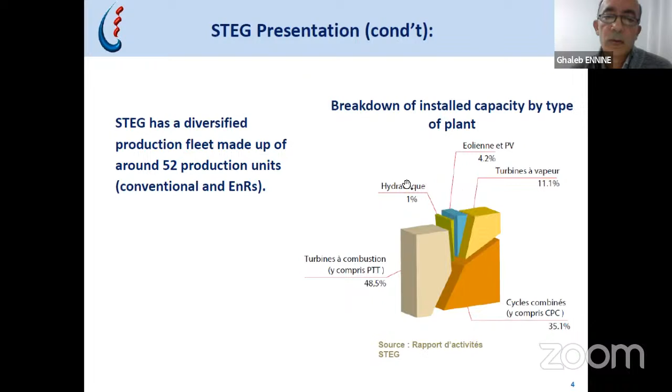STEG has, in fact, a diversified production fleet. We have about 52 production units, especially combined cycle turbine, combustion turbine, and importantly, our renewable energy is very small, about 4% compared to the total power installed in STEG.

This slide shows that our resources in primary energy, here in red, are in continuous decline of about 7% per year from 2010, while demand, here in blue, shows an annual increase of about 1% per year, and we have a deficit of almost 6,000 ktoe.

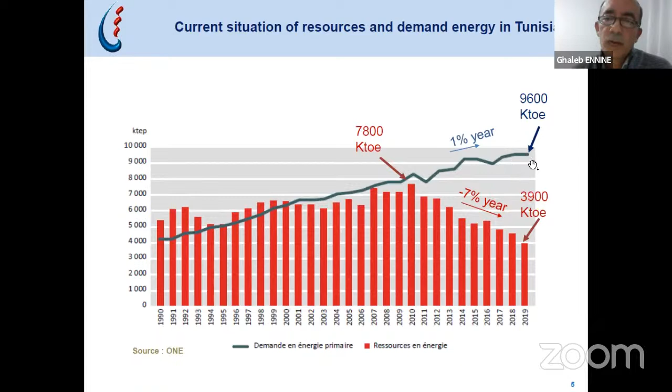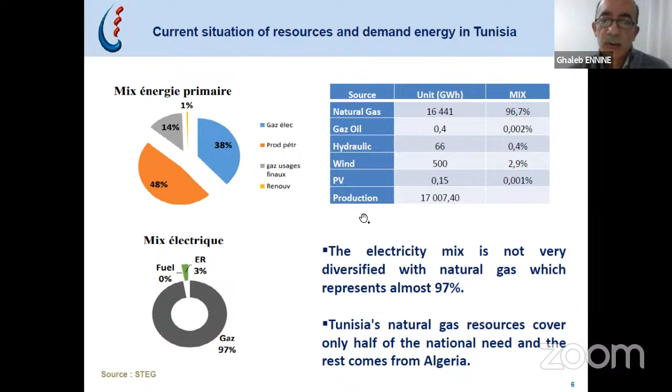As I said, the part of renewable energy is very small, and our energy mix is mainly based on fossil natural gas. Renewable energy is about 3 to 4% compared to the total installed capacity. Also our Tunisian natural gas resources cover only half of our national need, and the rest comes from Algeria. So we don't have energy independence in Tunisia, and that's why we should look to other resources, other green resources, in the future.

This slide shows the workday load curve. Here in green we notice that the maximum peak is in the day, between 10 to 6 p.m., especially in summer. The green curve is in summer, and the other curves are in winter and other seasons. So we have a very important development of summer peak, which could cause significant operating problems and may sometimes lead to load shedding operations in some regions in summer. And we have a fairly low winter load dip, and a very high specific consumption.

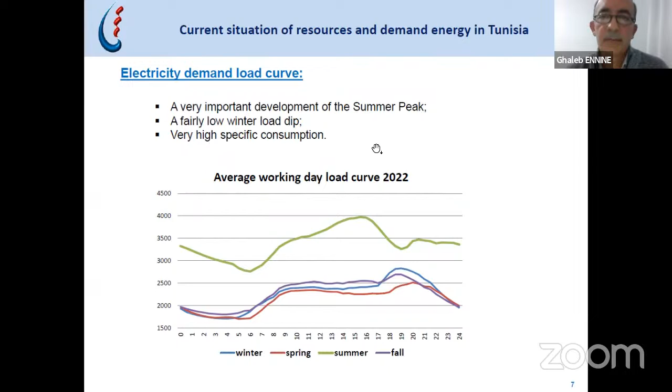Our national energy strategy has 3 targets: energy efficiency, renewable energy integration, and greenhouse reduction.

This has been debated since 2013 and reviewed in 2022. For energy efficiency, we have to accelerate action with the aim of reducing national primary energy consumption by 30% in 2030 compared to 2010.

For renewable energy, we have a challenge to reach the target of 35% in 2030, 50% in 2035, and 80% in 2050.

For greenhouse reduction, following the ratification of the Paris Agreement, Tunisia is committed to reducing CO2 emissions by about 45% reduction in carbon intensity in 2030 compared to 2010.

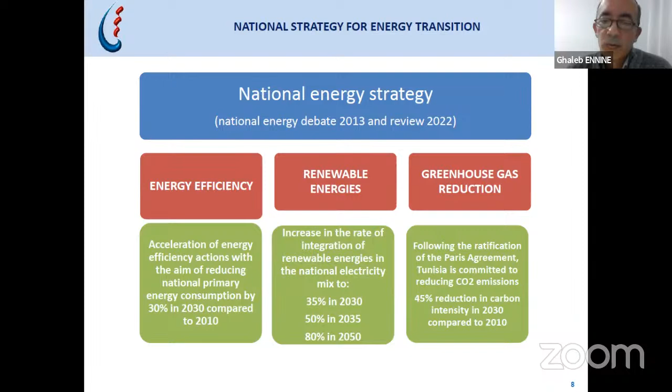This slide summarizes our STEG activities, the main topics we are currently working on. We work on renewable energy integration, demand management, storage and flexibility, green hydrogen, and electric mobility. All these topics are governed and linked by a smart grid.

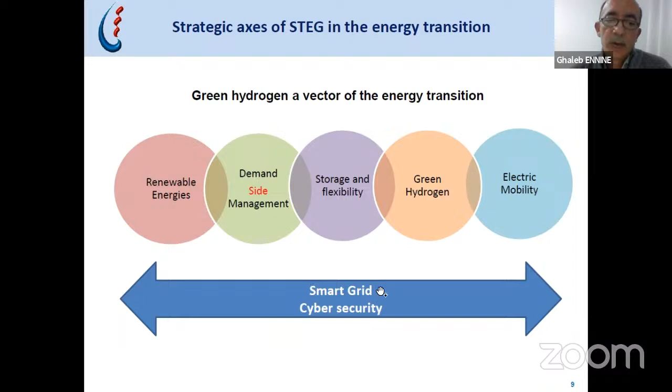We now have a grid project in STEG in order to introduce the smart grid in our electric park. This slide shows the complexity and interaction of the main topics we have in STEG.

Reinforcement of energy efficiency action, development of renewable energy, development of cross-border electrical interconnection, energy efficient technologies, contribution to the Tunisian solar plan, migration to a smart grid, deployment of energy storage solutions, development of electricity exchanges with neighbor countries like Algeria, Libya and Italy, and development of electrical connection projects.

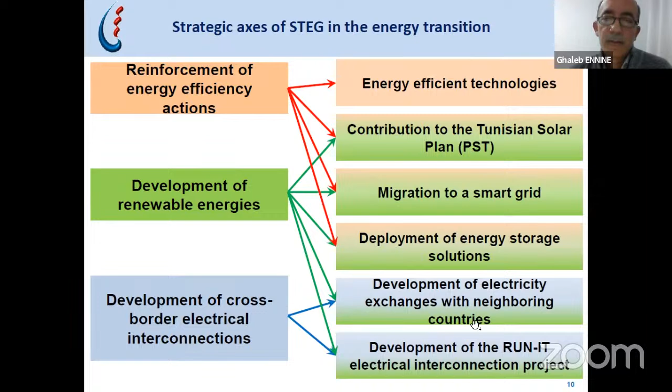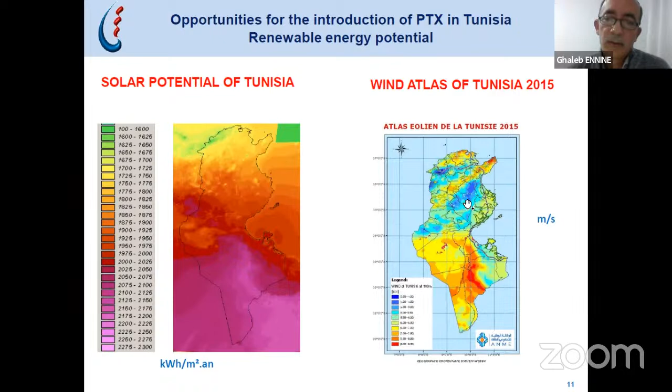And also for wind, we have good values in the north and in the center, marked here in blue color.

As I said, our renewable energy share is very small. The current situation is very little, about 250 megawatts in renewable energy.

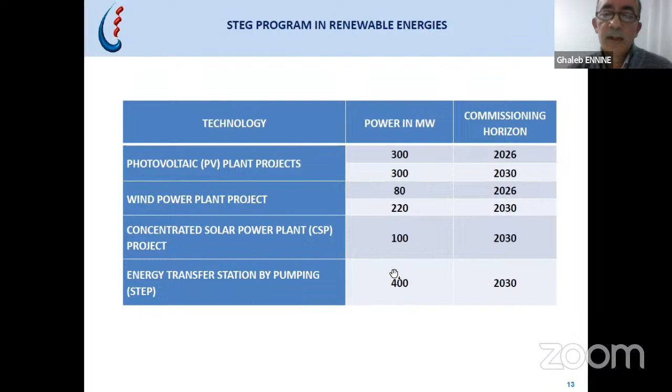This table summarizes the future projects to be achieved in Tunisia: photovoltaic, wind, and also concentrated solar power plants, CSP. The big project is the energy transfer station by pumping, which we call STEP - stations de pompage et turbinage. This is planned for STEG by around 2028 to 2030.

This slide shows that in Tunisia we have a significant potential for hydrogen. It is estimated at 25 million tons per year.

This potential largely satisfies local needs and export to European countries. Here it is the European country demand in 2030, and here our potential - we have a very big potential in Tunisia, both for local use and for export of green hydrogen.

And here we have two scenarios: the ALT, which is the moderate scenario, and the ADV, the advanced optimistic scenario.

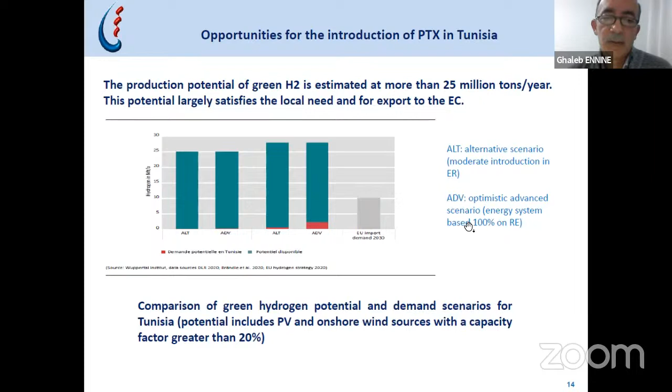This chart explains the evolution of the production and consumption of green hydrogen in different sectors: transport, the electricity sector, and other sectors.

We notice that starting here in dark blue is the transport sector, which will begin in 2030 and 2035. The electricity sector, in light blue, will begin in 2040, with some industrial use in the industrial sector and the electrical sector.

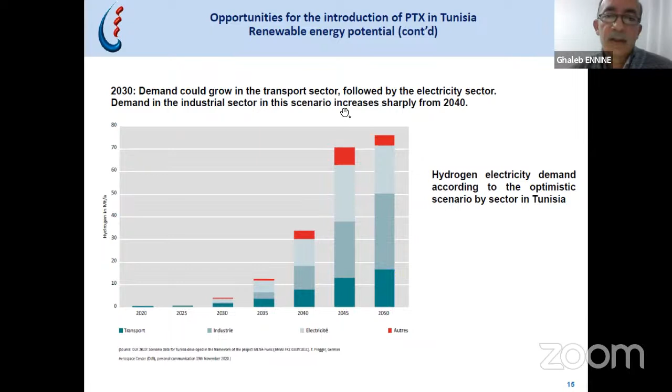So here in Tunisia we have some opportunities to ensure better stability of our electrical network by smoothing the consumption peak, especially in summer, through the use of gas to power storage fuel cells.

This chart summarizes that we could find solutions especially for isolated sites, because we have some isolated sites in Tunisia, some islands like Kerkena Island, and the extreme south like Tataouine, Tozeur, etc. Bringing electricity there is very costly, so why not use fuel cells combined and coupled with batteries, lithium batteries - this solution could provide more than 7,000 hours of continuous operation.

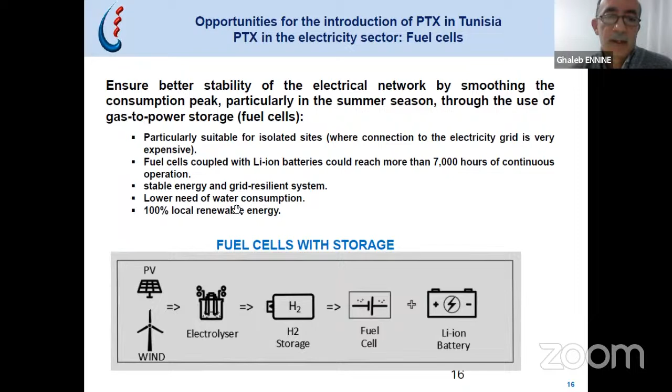The second opportunity deals with power to gas. In this solution, the produced hydrogen could be injected directly into the gas pipeline. It could be blended with natural gas or used as 100% hydrogen.

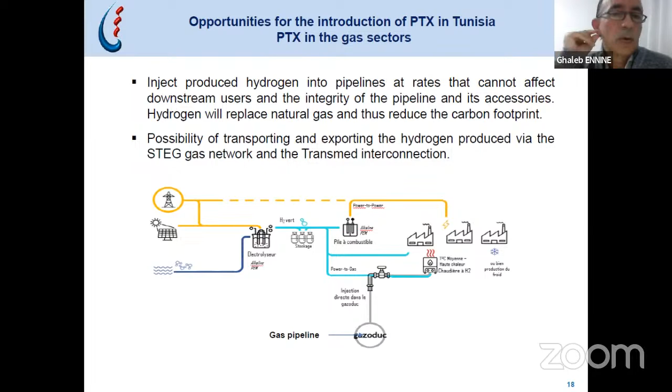In Tunisia we have a good gas network. Here it shows our gas network, the Tunisian gas network, and here is the Transmed gas network that comes from Algeria across Tunisia, and then crosses the Mediterranean Sea to Italy. So we have the opportunity to transport hydrogen from the south and central regions to the north for export. It could be consumed locally, but we also have the opportunity to export it to Italy.

However, I think that the economic viability of injecting green hydrogen nowadays in the short term is not justified, because I think it is better to develop its derivatives, like ammonia, given the very significant local needs, in particular for the phosphate industry.

As a number, our phosphate company, the Groupe Chimique, has an ammonia consumption of about 450,000 tons per year. So a very big quantity that would be produced locally from green hydrogen.

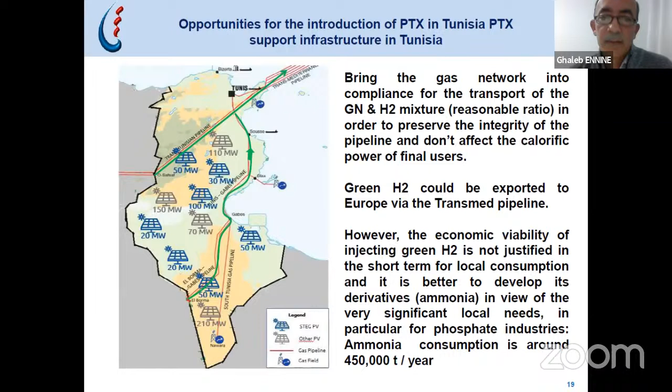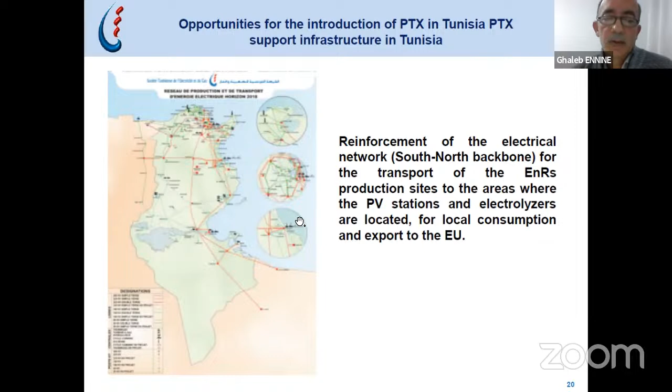Another opportunity is the hydrogen turbine. Hydrogen turbine for STEG is a very, very important topic. Unfortunately, nowadays I think it is in the experimental stage, but as an opportunity for us, we will substitute fossil natural gas with green hydrogen, and we will have better energy independence in our energy mix. I think that in the future it is a very promising technology that will make significant progress in the medium and long terms.

We see that Siemens and Mitsubishi have already produced some prototypes of these turbines, and they are very promising for the future. But in the short term we have the challenge that they are large consumers of green hydrogen. This requires vast land to be secured for renewable energy plants, water consumption - because we have hydric stress in Tunisia, so we have the problem of water consumption - and storage facilities, transport, etc. This is the challenge, but we are confident that in the middle and long term, the hydrogen turbine will play a very, very big role in our energy mix.

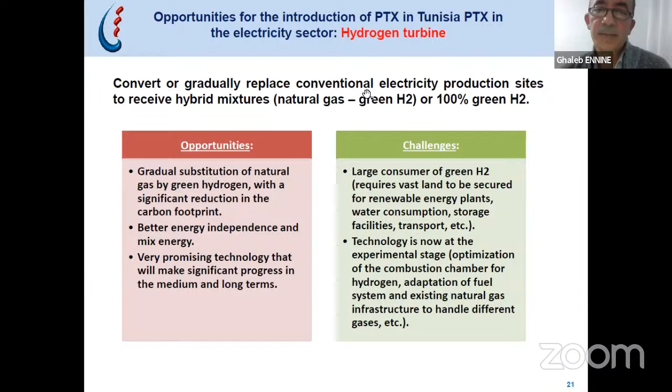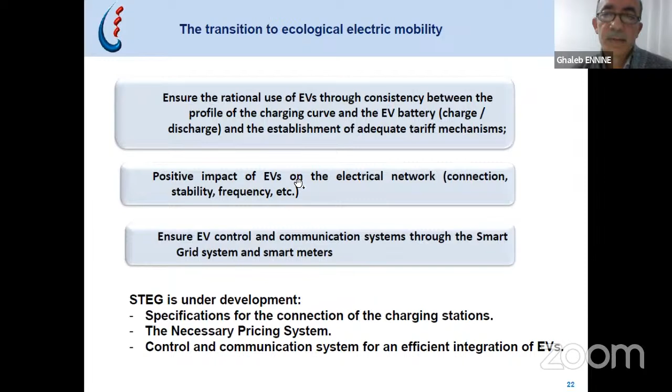As I said, we have many challenges in Tunisia, which I will summarize here: the share of renewable energy currently represents only 3% of the Tunisian energy mix. Hydrogen only becomes relevant as a storage medium when the share of renewable energy is above 70% in the electricity mix. So right now we cannot speak about the derivatives of hydrogen or other technologies - we have to reach 70% in order to begin the green hydrogen industry.

Green hydrogen production sites are currently limited to coastal sites for seawater supply purposes, and unfortunately for inland sites they have difficulty with this technology, so we will think about solutions for inland regions. Why not introduce some hydrogen activities with the purpose of recycling water, like with fuel cells that could recycle water and reduce water demand.

Also, we have the contractual scheme, which could be public-private partnership, or 100 private or 100 public, and we don't know. We don't have a very clear idea about the contractual scheme for the future project, and also there's an absence of a framework governing the marketing of green hydrogen in the local market and/or abroad.

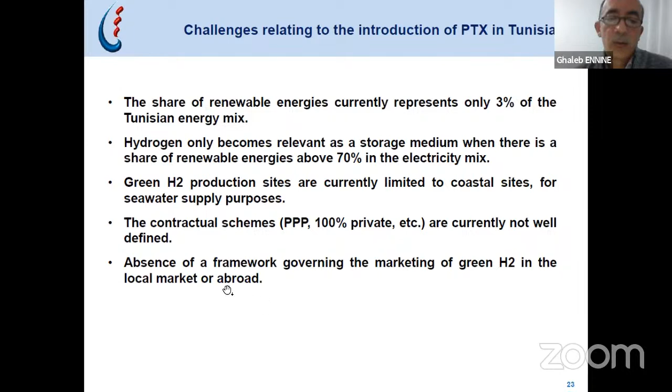So I thank our Ministry of Industry for creating a steering committee that involves the main stakeholders, with the task to develop the national strategy of green hydrogen, support the creation of a green hydrogen economy, strengthen research, training and innovation, and set up a pilot hydrogen production project in collaboration with international institutions. This committee will be assisted by local and foreign experts during the development of a strategic plan, scheduled for the end of 2024.

So I come to the end of my presentation. Our target is to develop our strategic plan before the end of 2024. We have to analyze the potential of existing infrastructure and the need for additional infrastructure for the development of our Power-to-X.

We need to participate in the development of an appropriate regulatory framework governing Power-to-X in Tunisia - I mean the contractual scheme - and participate in the establishment of regulation relating to the marketing of green hydrogen and derivatives in the local markets, or if they are intended for export.

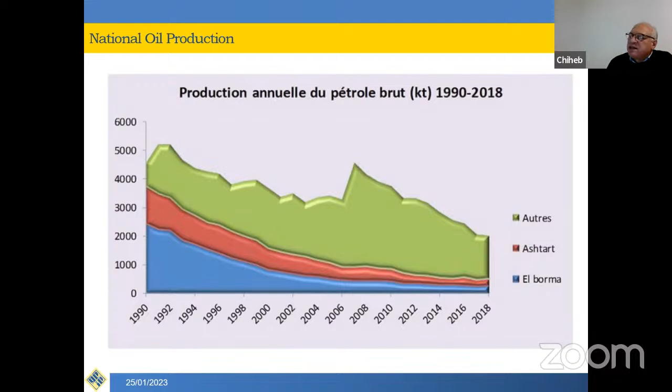As you know, Tunisia produces some oil and some gas, but this production is in recession for both oil and gas. And of course, now we do not have self-sufficiency, mainly in gas and in oil, both. And so we are importing gas from Algeria, and as you see, the amount of imported gas becomes much higher than the amount of gas which is locally produced, which is now a serious matter of energy independence.

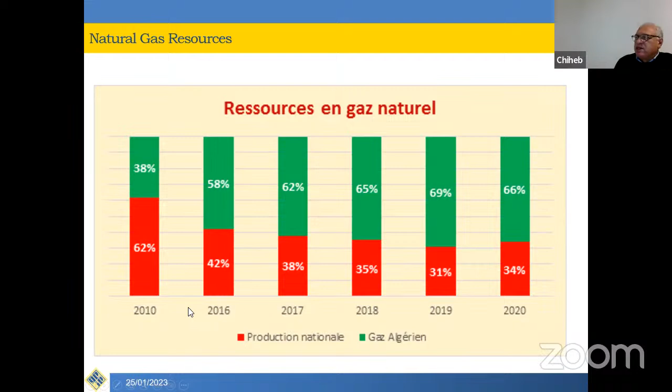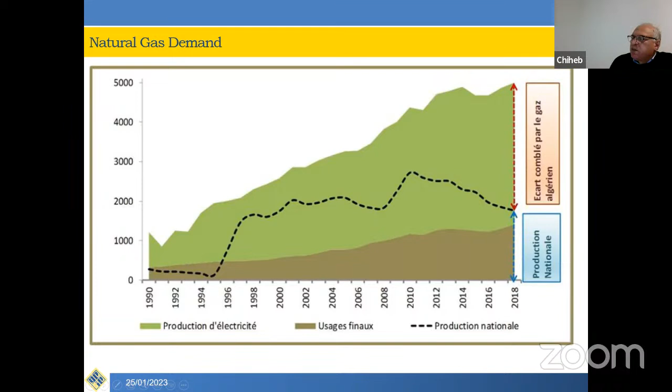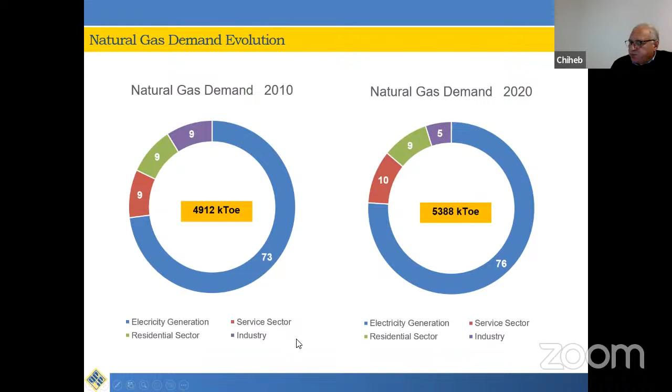And so the global resources from primary energy resources, from fossil ones, are in recession, and this is not a good sign. Now, the demand is increasing every year, and this demand is shared between electricity generation, which takes most of the imported gas, and then, of course, the rest of the sectors, meaning industrial, residential, and so on.

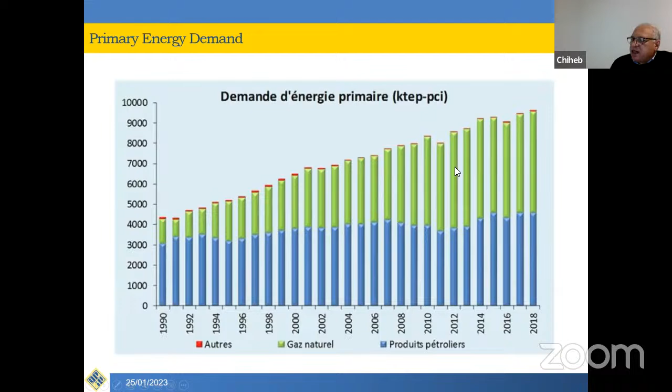This is the demand in terms of oil products and gas. And then the balance, as shown by Ghaleb Enin a few minutes ago, shows that we now have a deficit.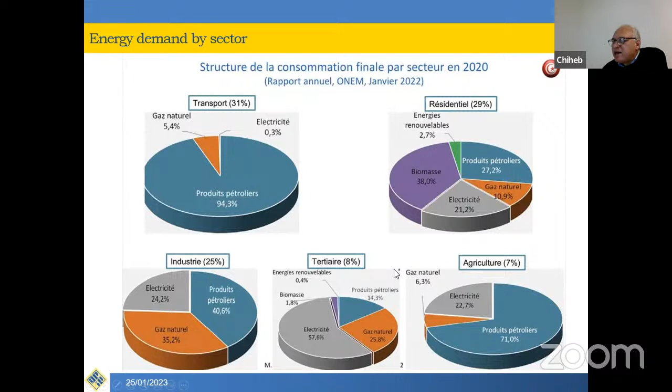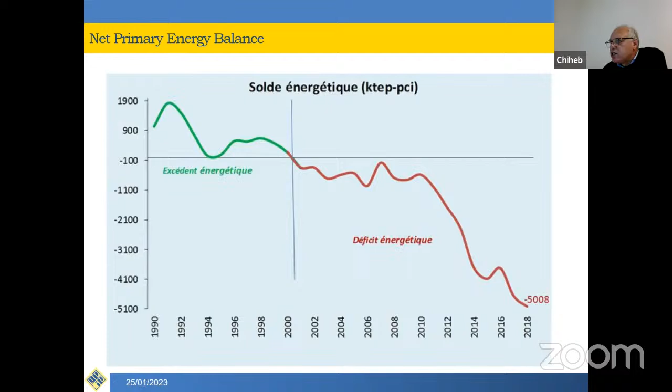This is nearly the same. So this is the net deficit now, that Tunisia has a deficit on energy, and so we need to import and to find alternative resources.

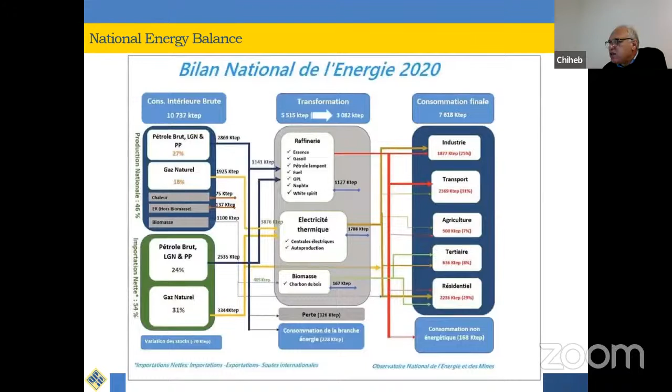This shows the balance between the different sectors, and I think we have seen it on the graph.

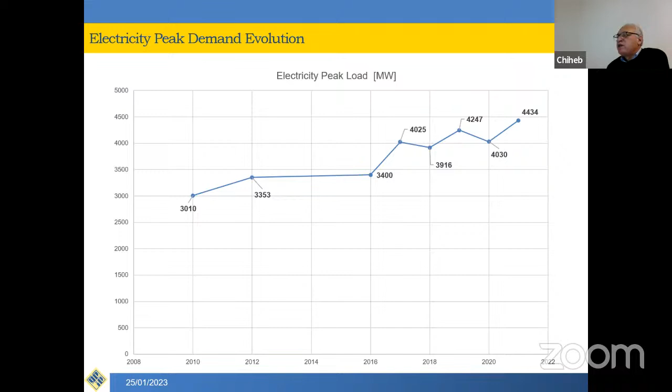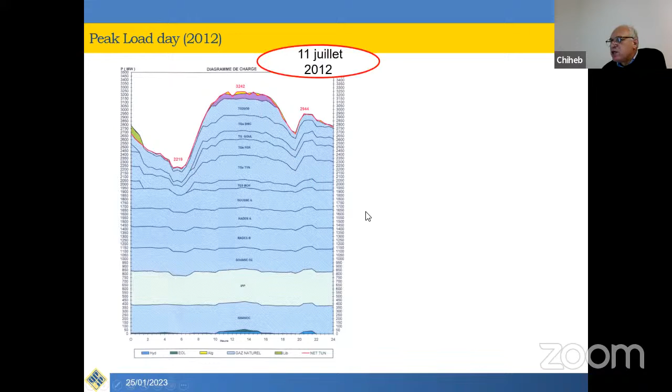Then for the electricity sector, we can see that the electricity peak demand is increasing from one year to the next. This peak demand has been shown by Mr. Ghali Benin, and we see that there is a difference between summer and winter, and also a large difference between the trough and the peak, mainly in summer. This is also a new challenge for which Tunisia has to find real solutions.

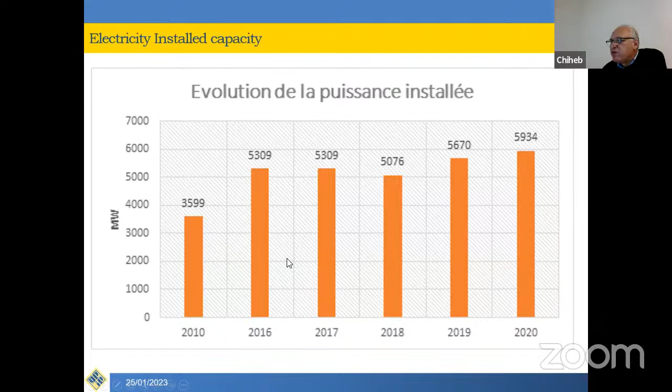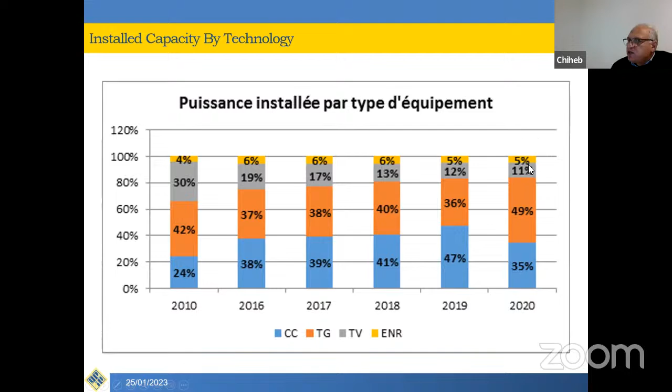Installed capacity, I will go fast because Ghali has shown this. So we have something like 6,000 megawatts of installed capacity, mainly running with gas now. It's shared between combined cycle, gas turbine, steam turbine, and renewables. The share of renewables is only 5% of the installed capacity, and the national production is also in evolution.

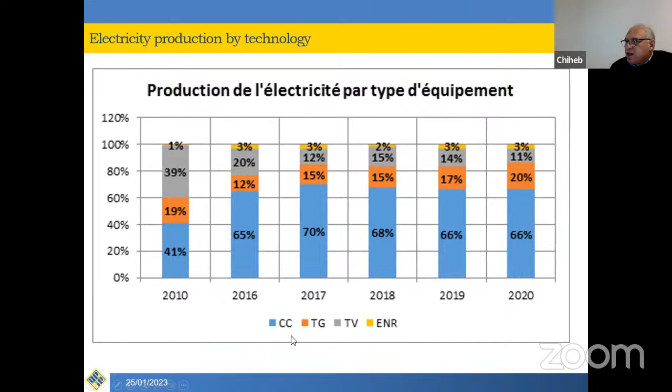Now we can see that the share of renewables is only 3%, and mainly the combined cycles are offering the major part of the electricity demand. Now here we can see some facts about...

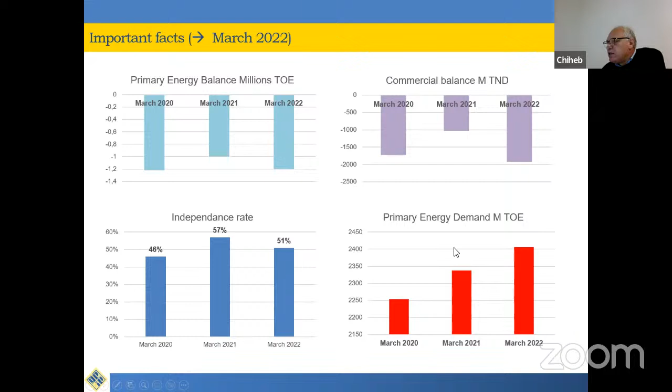This shows the comparison between the month of January until the month of March. For the primary energy balance, we see that the balance is negative, of course, but the trough is going to be deeper every year. The commercial balance is influenced, of course, because of the import and also later on the subsidy. The independence rate is low, so we have only 50%, or less than 50% sometimes, of independence, and the demand is increasing every year.

So then Tunisia has built this Tunisian Solar Plan, which is aiming to produce 30% of its electricity by 2030. This objective has been revised to become 35% by 2030, and it aims also to reduce the CO2 emissions by 30% by 2030, and now this has been also revised to 42% CO2 reduction by 2030.

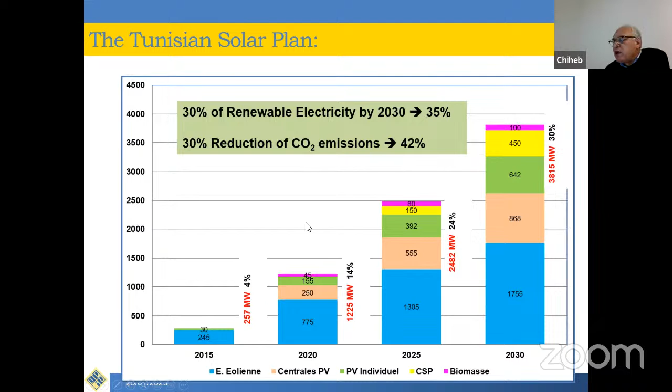So we have two major objectives: the implementation of renewable units for electricity production and the reduction of CO2 emissions, and this can be done only by the implementation of renewables.

This ambitious solar plan aims to build PV and wind plants by STEG, by private sector, meaning auto production in the private sector, as producers and providers for STEG later on, which will be in charge of the distribution.

STEG has its own projects, and some of them have started to produce. Some of them are under construction, and some of them are in the contracts phase, and so it's going on. And of course, these are the planned capacities.

Besides STEG, we have the private sector, which will come through concession and authorization schemes. Concessions mean that they will have the location and the land provided by the government or by the Tunisian authorities, and the authorization scheme means that the producers will provide the land on which they will implement their systems.

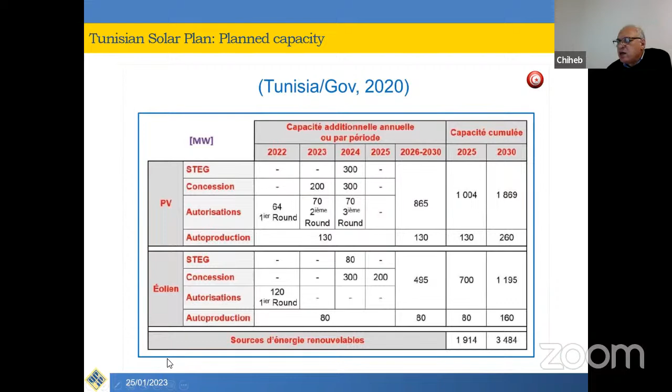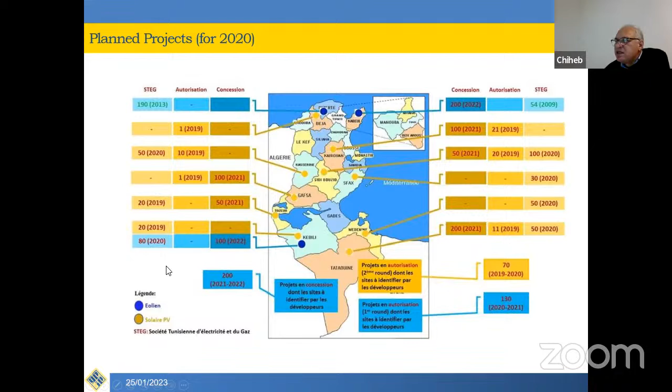We will see that these new renewable plants will cover all the regions of Tunisia. We see the different models and the different locations, and we see that we cover all the land. This is very important because it will contribute to the regional development in Tunisia, because now some regions are missing development because they lack enough electricity for the implementation of production plants.

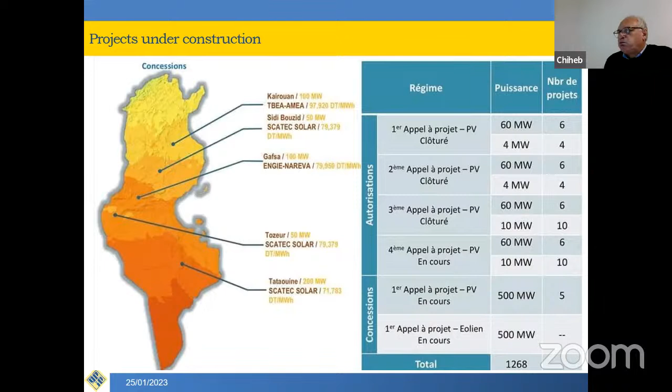These are the projects which are under construction. The contracts have been signed and the projects are being developed. We also have the distributed PV installations, which are part of a national program that was a successful program.

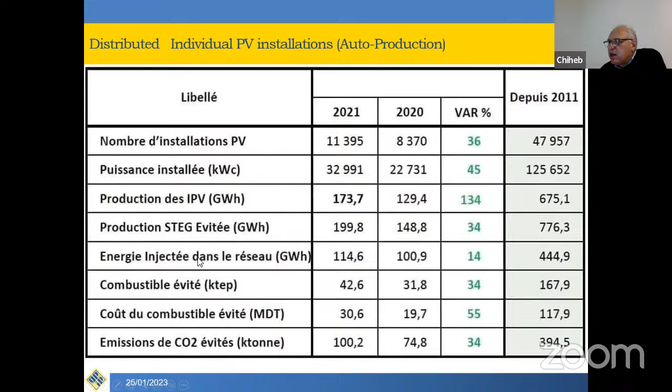It looks as if the internet connection is a little bit broken. Can you hear me? Yeah, yes, we hear you. The connection is interrupted.

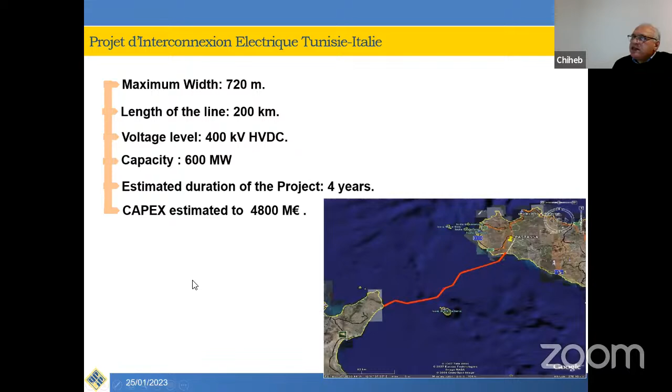This project aims to have a capacity of 600 megawatts, and this is very important for the stability of the Tunisian grid. The second important project is the pumped hydroelectric energy storage system, and it aims to build storage in a high reservoir dam.

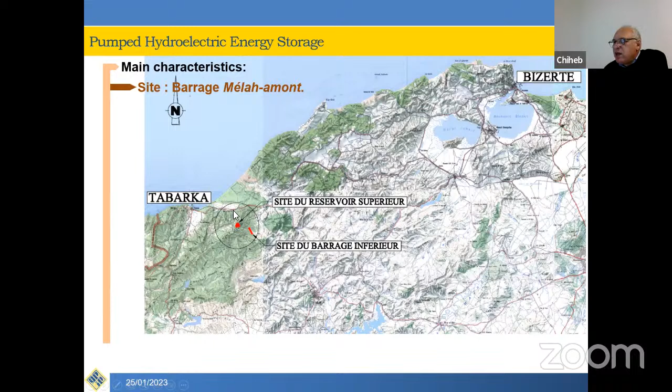The project has been planned for the Barrage Mélah in the north of Tunisia, and this project aims to have a capacity of 2 times 200 megawatts of hydroelectricity with good global efficiency.

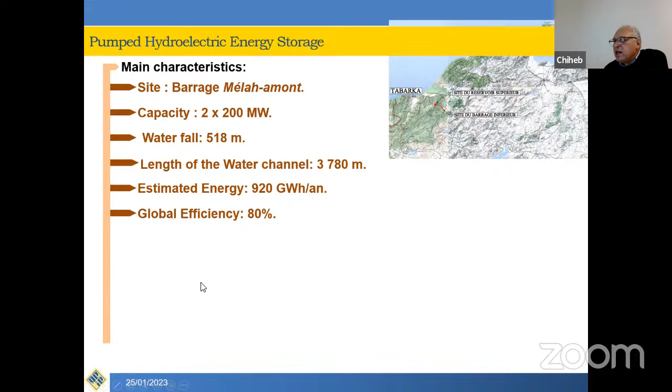This is a very important project also to stabilize the grid and to have better introduction of renewables, and to give the capacity of storage of excess electricity produced by renewables.

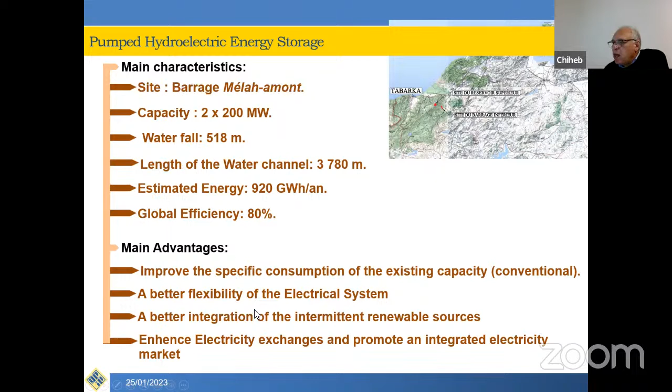Of course, hydrogen could also be a very good opportunity for Tunisia to stabilize the grid and to be used as a media for storage of electricity.

Ghalbeni has presented the ambitions and the projects of STEG, and it looks very important and very interesting, but hydrogen can also offer more opportunities than electricity generation and more than power to power.

It can also be power to X, meaning producing different materials such as ammonia, methanol, synthetic fuels, and so on. This will cover industrial activities, but also the transportation sector, and why not the building sector.

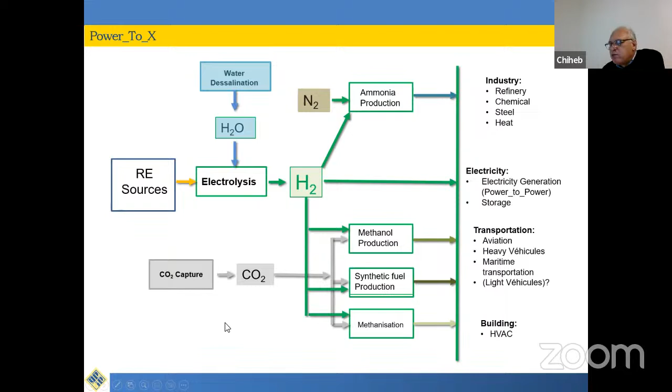What are the strengths of Tunisia? Ghalb has mentioned that one important point is the availability of solar radiation, but also the low cost of renewable electricity.

The calls for tenders and the contracts which have been signed by the Tunisian authorities and the private sector have shown that electricity is at low cost, and this is a very important point. Renewable electricity is cheap.

We have some very good relations to Europe and to investors, and green technology could be a new opportunity for Tunisia for investment. And of course, the proximity and vicinity to Europe means we can transport this electricity to Europe and vice versa.

The second strong point is that we have a pipeline which is already existing, crossing Tunisia. It's going from Algeria to Italy, mainly to Europe, and it's crossing Tunisia.

This pipeline can be a media to transport hydrogen, either as a blending material - so we can blend natural gas with hydrogen - or we can also transport only hydrogen. Now there are 5 existing pipes, but there is a possibility of extension.

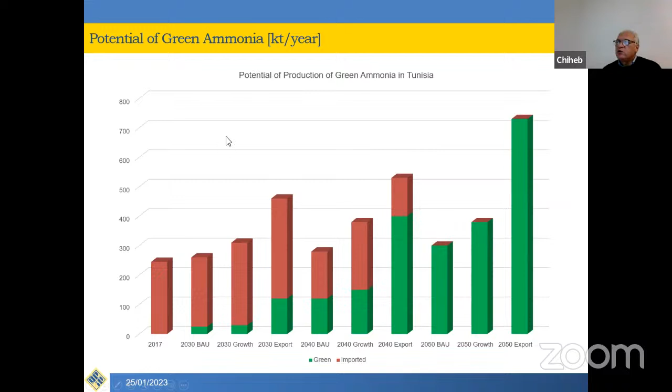Ammonia could be used not only for fertilizer, but also as a fuel for ships. This is a good opportunity for Tunisia because its location is very interesting. As you know, European regulations impose that some of the fuel of ships coming to European harbors has to be green. So providing green fuels for ships could be a real opportunity for Tunisia, and the green fuels could be green ammonia or green methanol.

Methanol is produced by different countries. Tunisia is buying methanol from Spain, France, Netherlands, Belgium, according to the market price. There are no long-term contracts, so it is bought according to the best price which is offered.

It is used mainly in industry. Many industries do use methanol. In Tunisia, we do not use methanol as fuel as it is the case for many other countries, but it is only used for industry.

Methanol is produced mainly by chemical processes, from syngas, from fossils. But now the new trend is to produce methanol from biomass or from electricity as green methanol. Of course, the technology is not that mature, and the units producing this green methanol are not that significant.

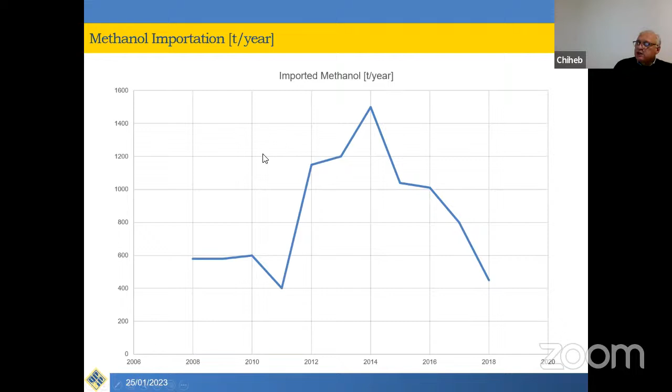But we can imagine also some different scenarios. The business as usual scenario is going very slowly, and so it cannot justify the implementation of a unit for green methanol production locally, unless we think about a growth of the use of methanol in Tunisia, meaning new industries demanding methanol.

Or the implementation of something for export. This could be, of course, for ships as fuel, but it could be also export of methanol as it is. Methanol as well as ammonia are easy to export since it is liquid, much easier than hydrogen. So we can have some optimistic scenario for methanol, and imagine that Tunisia could be an exporter.

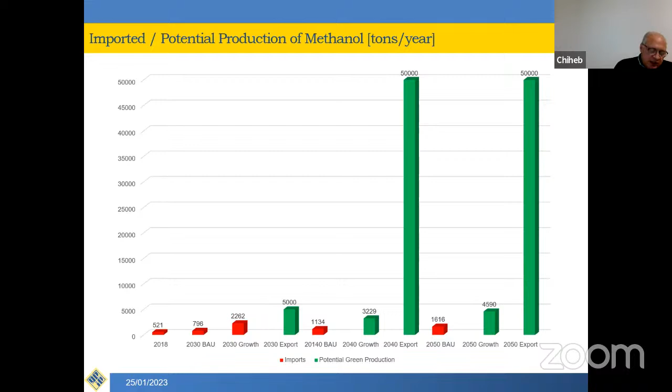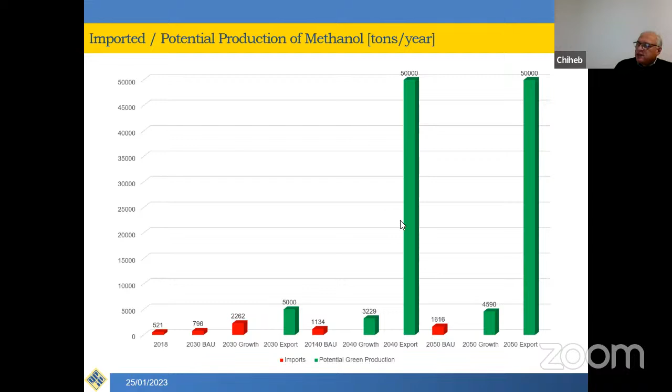In this case, Tunisia can implement one unit or multiple units similar to the one in Iceland, meaning 5,000 tons per year, and multiple units could be implemented. We can go even for very optimistic scenarios, since the solar radiation is there, so we can go for many units.

Now, for the transport, hydrogen can be used mainly for heavy duty vehicles, meaning trucks and buses. It could be used for boats, and now also for aviation, because there is this international agreement of IATA, which aims to reduce the emissions of CO2 by the air transporters.

Tunisia has signed this agreement, but till now Tunisia is not using green fuels, although it aims to reduce its emissions of CO2. So there is no way to achieve this besides producing and consuming green synthetic fuels. Of course, these fuels are more expensive than the conventional ones.

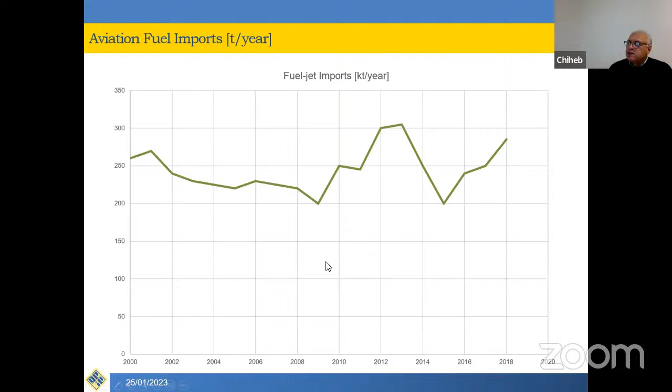And of course, this needs a real policy from the Tunisian government to support the adoption of these fuels. So if we go for a business as usual model, because of this agreement, Tunisia is supposed to go for half of its consumption of kerosene by 2040.

And so this can give place to a local unit for production of green kerosene, and 100% by 2050. But if Tunisia can go for the export of this resource, then there is a larger potential for the implementation of units producing green kerosene or green jet fuels for the future.

So very quickly, because I think I finished my time. There is a potential in Tunisia, a very good potential for hydrogen and power to X in general. Now we need to develop some demonstration projects, to learn the technology, to build capacity in Tunisia, to be able to go further in the next future with those technologies, and to implement facilities for the production of green hydrogen for both the local market and for export.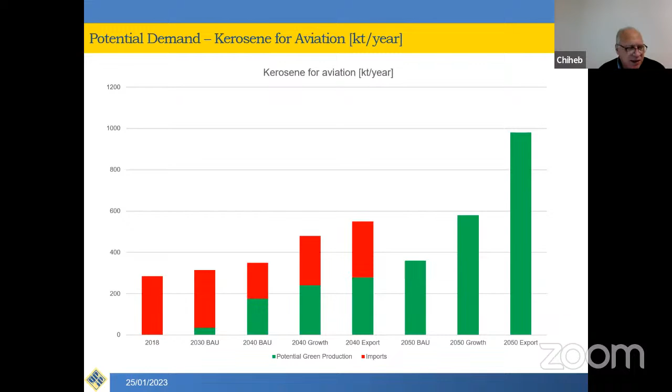With this, I think I have finished, and my time is finished also. Thank you for your kind attention.

Professor Bowden, thank you very, very much for this very interesting presentation. And thanks again also to Engineer Nguyen for his presentation. So I guess, I see that we have seen two very nice overviews about the situation in Tunisia. Maybe you can close the screen sharing so that we can see each other a little bit better. And let's come a little bit to a discussion. I do understand that there are quite interesting goals to go forward. And you, Mr.

Bowden, said that if you go for green jet fuel, or you, Mr. Nguyen, if you go for PTX, there is a potential, of course. This is also what we see in Tunisia and other countries in the Maghreb area. But the question arises: who is paying for that? Who is going to put money on the table for the first demonstration plants - the first methanol plant, the first green ammonia plant, and maybe Fischer-Tropsch synthesis for a demonstration? Do you have any idea? Does the money come from abroad? Do you have the own strengths to do this? How do you see this? Maybe we start with Monsieur Nguyen, then switch to Professor Bowden.